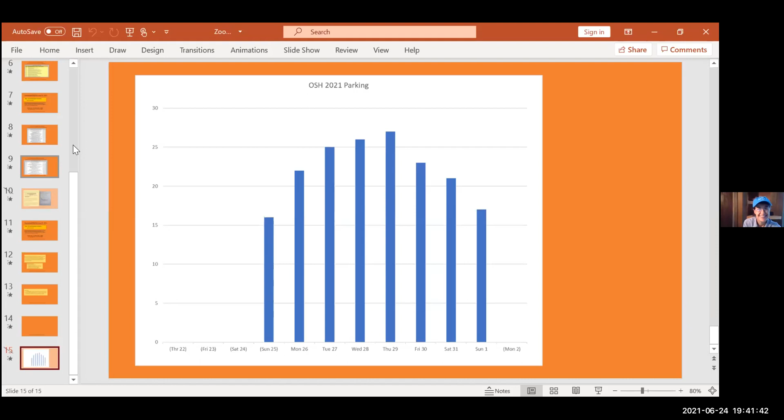Pete's put up a list of what's upcoming. For those of you who don't know, Katama has literally some of the longest and best grass runways on the planet. You literally park and drive your airplane down. They give us a discount for parking at the beach, and there's food available. So come eat lunch, get ice cream, bring your family, and go to the beach.

Hey CJ, about arriving with everyone else to Oshkosh and parking with everyone else, is it going to be difficult to park with everyone if we don't arrive together on that Friday before? It will be more difficult.

The reason is that Vintage created an official first come, first serve policy. They've committed to a couple of things. First, the reason we want as many people on the ground on the 23rd is Oshkosh rows are 7 airplanes wide, so they literally park next to each other, 7 wide, leaving enough space to drive down the middle of the road. There's something called end capping, where one end of the row is open so airplanes can get in, and the other end is a camping space dedicated only to Comanches for ComancheTown.

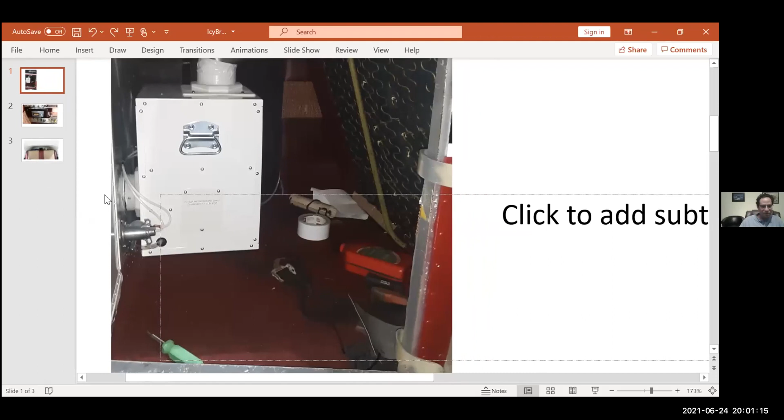In any case, that's the system in there. What you see is the typical Piper external power port that I've installed in the back wall of the baggage compartment. I put a Piper external power plug on the Arctic Air system. Then just above that and to the left, right there is where the hot air exits the system and goes into the tail cone area of the airplane.

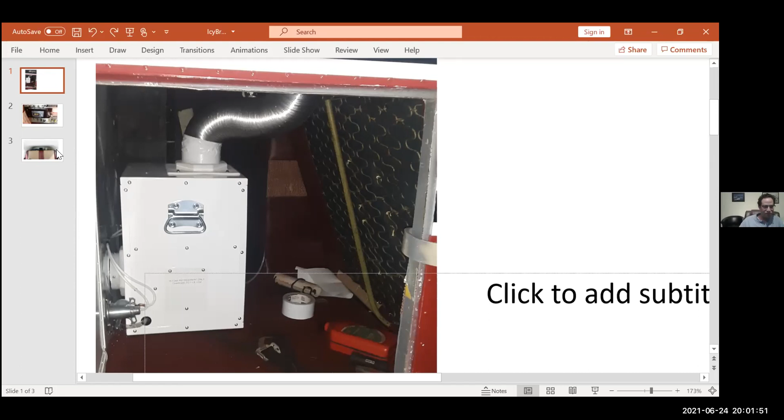Then the last picture there, the middle one, this is the controller for it. I mounted it in the lower left of my instrument panel, just above where the switches are, in a place that long ago had a transponder in it. The controls for the actual air conditioner are that sort of multi-position button on the gray plastic controller there.

This is something I found a little bit difficult to use. The interface is touchy, it's very touchy, that little button there. But once you get used to it, you can do it. To me, a very important feature is just to the right of that, that big metal toggle switch I put in, which is the control for a relay to completely provide power or kill power to the system.

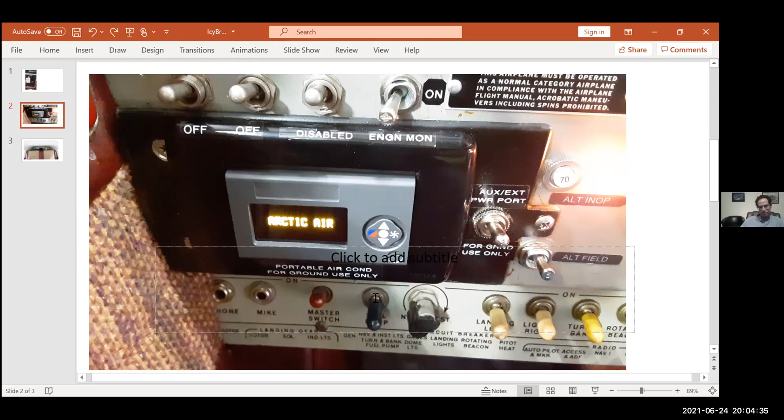I know Greg wants to talk about the system a little bit, and I can add some of the additional issues I've had. CJ, did you say Chris is here or not? Chris Cotton wasn't able to join us tonight. Okay. But his installation photos are here. So do you want me to talk about any other issues I've had, or wait till Greg has spoken?

I would say, well, you mean with respect to the amperage troubleshooting? Right, yeah. I think it's really helpful for people to know that we've got one installed that's working flawlessly, and one where you're troubleshooting some issues, so that if we ran into it, we'd know what to look for and what to do. Yeah, so my understanding is that this gentleman, Chris Cotton, has had his working without issues.

I installed mine over the winter, so I obviously didn't get a chance to run it, although I sure tried, cranking up cabin heat on full and running it to see what happened. But now that it's summertime and I'm really getting to use it, I've had a consistent problem of high amp loads, excessively high, even with low. You can control the speed of the compressor, and even with it turned way down to speed 3, I'm seeing amp loads that far exceed what it should be pulling, and it's been a problem.

So I'm working with Arctic Air to figure out what's going on. There may be a bad board, it may be the compressor, I don't know. In any case, long story short, I think I'll eventually be real happy with the system once the issues are resolved.

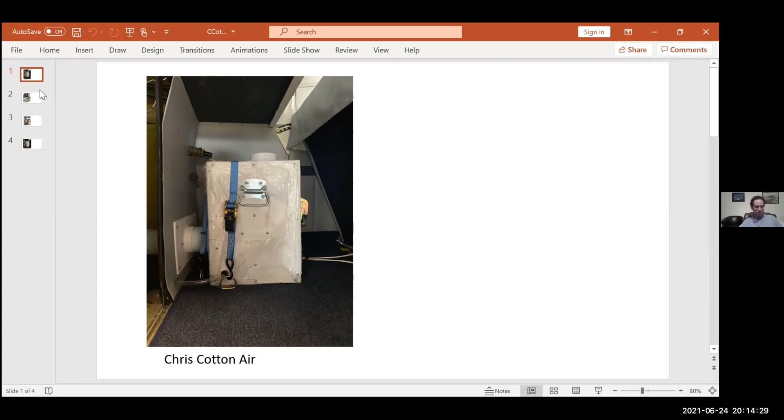And then as a side to that, because we were involved with 12 and 24 volt air conditioning, I was approached by a steel mill who needed to cool the cabs of the overhead cranes inside the steel mill. And I worked with a company, or a couple of companies, that developed a system that does that. So as it happens, I'm also in the business of DC powered air conditioners, but mine are applied to overhead cranes inside steel mills.

Well, it's interesting how you get into any business, in my estimation. This all started whenever I was having shoulder surgery years ago. A company called EB Ice was pumping cold water over my shoulder, and I thought, this could work in an airplane.

I fly Cirrus, and I didn't want to pay the $25,000 for the installation and an air conditioning unit for the plane. I only needed it on the ground, really. So I took ice, put it in a cooler, had an oil cooler at the time, and we pumped cold water through it.

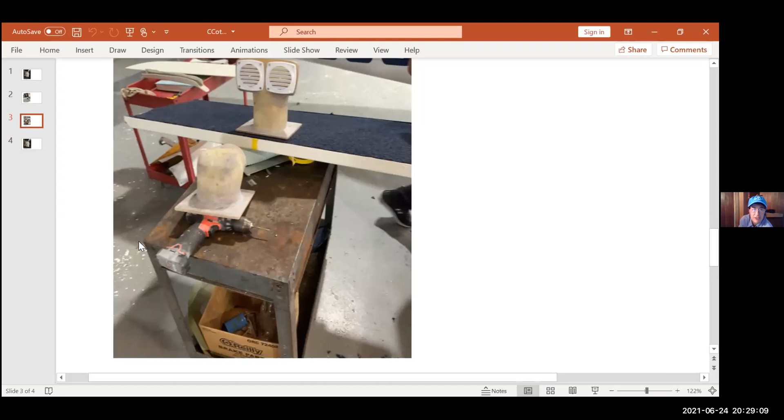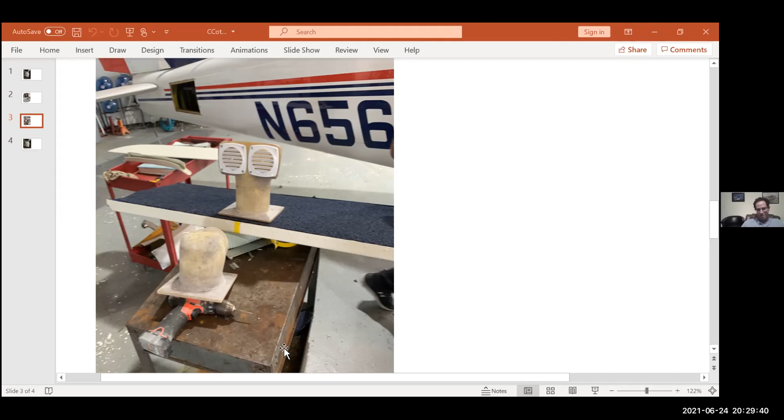Second question is for Mark Sullivan, who has a twin Comanche. Do you need 2 70 amp alternators in the twin? Because the original alternator conversion for the Twin Comanche was 2 40 amp Interav alternators. My answer would be, if you're asking me, I would say no - it sounds to me like you've got an 80 amp supply, with the exception of during an engine failure. But I would leave that up to whoever's doing the job to say. I'm not familiar enough with the electrical system on the twin Comanche to say.

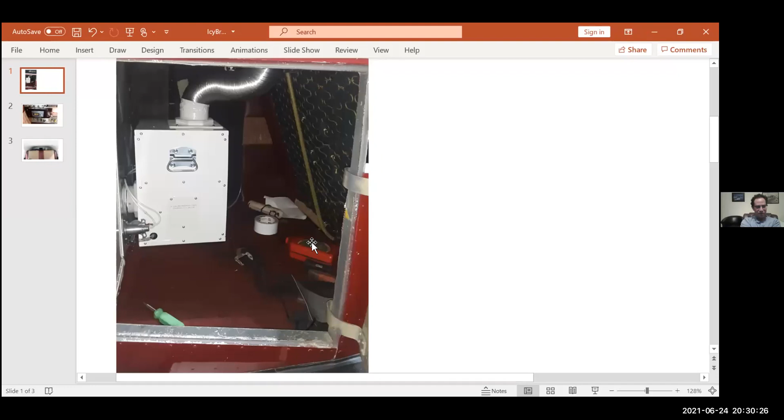I was going to say, if I'm not sure who's running the slides, can you go back to the slide that shows my baggage compartment? I wanted to point out a few things. Okay, there - if you can just zoom in on the box, the white box. Great, perfect. So they talked about removing and installing it - if you want to take it out, it is a pretty easy setup.

So there are basically, let's see, pictures of the component - you just swipe it to the left. There's basically 1, 2, 3, 4 approximately connections to make when you want to take it in or out.

One is, of course, the plug, the big Piper external power plug you unplug. And then just below that, a couple inches below, is the condensation line. The way that I did it, it's routed through the back wall of the baggage compartment, and I have it running out to my reversed air scoop in the belly, so any condensation would actually drip down into the outflow air from the tail cone area. And I put a quick disconnect - you can barely see it in this picture, but at the very lower left, there's a quick disconnect for the condensation line.

And then, of course, where you see the outflow of the hot air right there, in my case, I simply pull that out, and then I've got a blanking plate that goes over that space. And then the last thing is the plug down in the lower right - that gray cord is what connects the unit to the digital controller, which is up in the instrument panel.

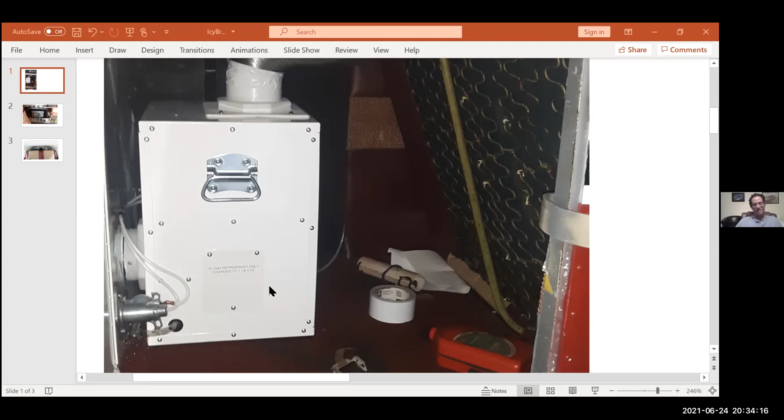Yeah, that duct just doesn't work in this. It doesn't have the bend radius for what you have here - it can't make the turn that we need to make. And the only way to make your duct work would be to cut a hole in my hat shelf, and I didn't want to do that.

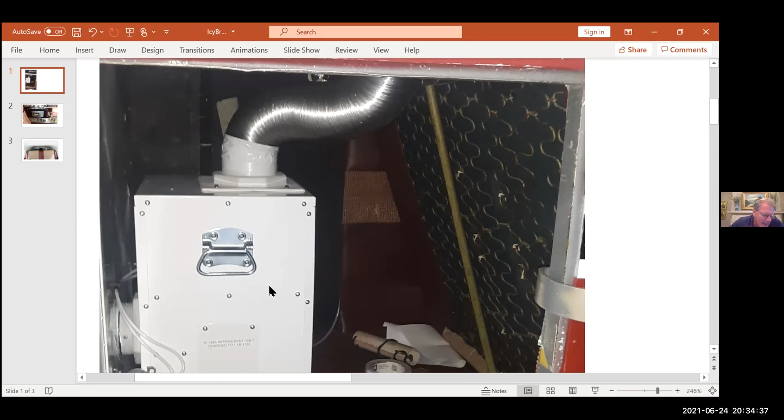Right. So, I noticed one of the other pictures on the other plane - somebody, did they make that out of fiberglass? It looked like they put two diffusers on it and it was fiberglass.

Oh, let me just say one thing before you switch over to that, because I want to finish on the removal and install. One thing I thought of - in my case, I wanted to have something holding this unit in there, in case I got into really heavy turbulence, I didn't want it to be able to fly around. You can't see it in the pictures, but I actually have two quick-connect 3/32 inch steel cables that go from two of the upper corners of the unit down to one of the baggage tie-down mounts. I have carabiners on them, so they're quick connect, and with those in there, there's no way it could fly up or fly around.

I think even if I went inverted - that's right. And the other idea was the handles that we put in there. That was kind of the idea, was on those handles, you can tie it down through the handles also. We always tell people to tie it down as they would luggage in there. Now, personally, I don't usually tie it down. I think it's a good idea to, but the tying down luggage and all, I don't do as much as I probably should.

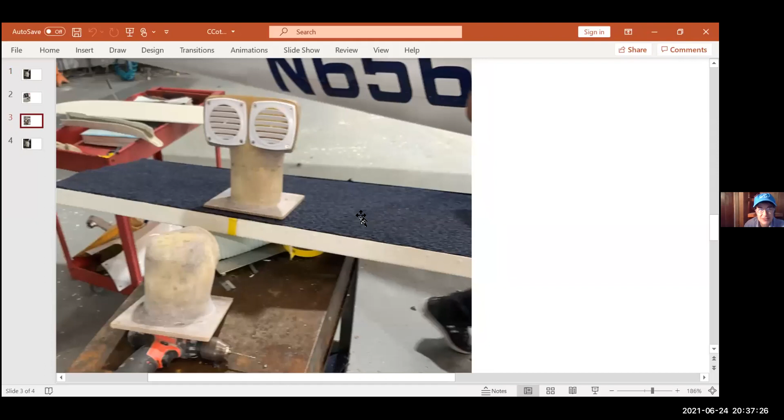And just real briefly, John, would now be a good time to jump over to Chris Cotton's photos for a second? Great, okay cool. Pete, if you can swing over to Chris Cotton's install photos for a sec, I just want to point out the louvers - back up one second, because that photo shows the louvers sitting on the bench getting ready. And then if you want to just go ahead to the photo that showed the entire airplane, or maybe it was a video, I forget which.

You can actually see... you know what, I don't know what they are. It's a good question, but Pete's circling the tail of 6561 Pop. Those vents are only on that one side of the airplane, but it was something he innovated as an extra way to get the air out. What he's done is replaced an inspection port.

We've always recommended the inspection plate because it was not a structural component of the airplane. That's where a lot of times I like the reverse scoop. I like the looks of his with the paint and everything else he's done. Sometimes I worry about when the vents are going down like that, if there's going to be a wind screen. Having the air, when you think if you're going 180, 200 miles an hour, the air coming by there, if it's able to create a negative pressure behind it and suck the air out, it helps a lot.

What I can tell you is that Cotton said he's in Houston, and he's got the same 70-amp plane power alternator that John Lon installed to enable the installation of Arctic Air in his, and he has the same unit. I sent him the same link that John texted me, and he's thrilled. So whatever it is about that install.

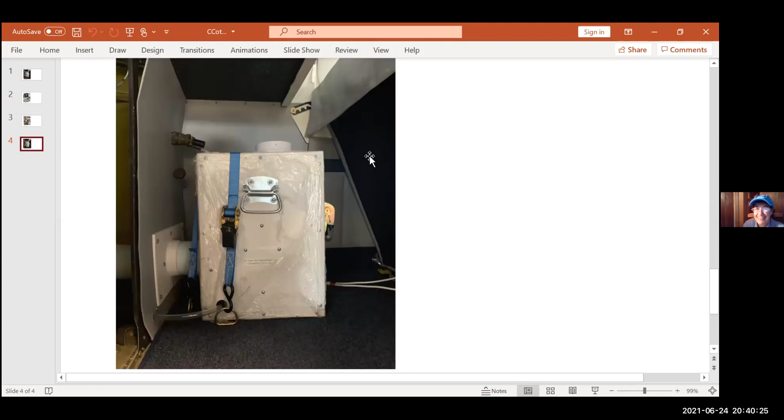That's just a view into his baggage area. In his case, when he was getting all this set up and working on it, he actually removed his baggage door. John, did you do the same thing when you were installing, or did you work with the door still in?

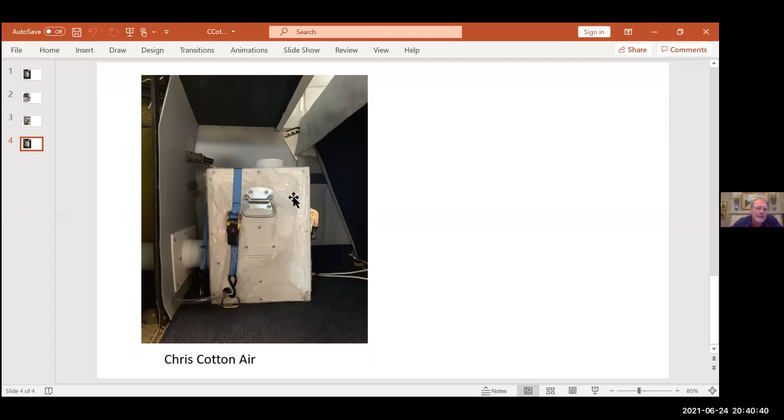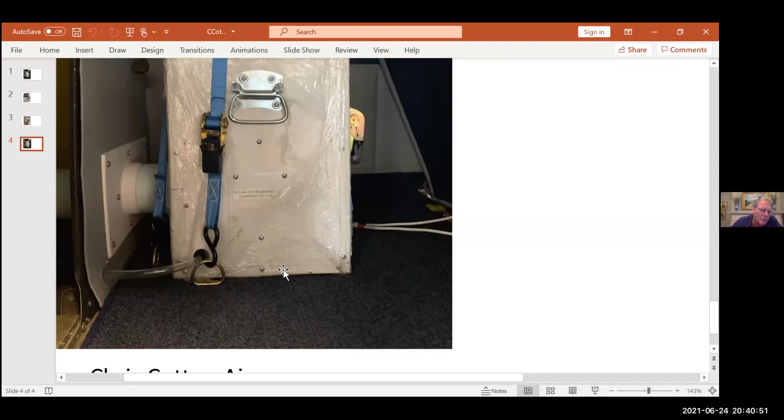Yep. So on that picture right there, it has the plastic piece that we send with the unit, and it doesn't look like he has a quick disconnect on his drain line in that unit. But the white plastic on the back bulkhead is the one we send with the unit, and that plastic duct connecting them is the one we send with the unit. He was able to clip it, but I don't see a quick disconnect on the drain line on that. Mine looks just like his, except that I omitted that plastic square.

Did you use our duct? Yes. Okay. Yes, and his duct, it looks like he ran it through ours, and to the left side of the bulkhead there's a white piece - it looks like he flared it out by twisting it on there, which is great. And then I see the wiring running on the floor up to the front of the airplane, it looks like, for the 12 volts - the positive and negative, it looks like.

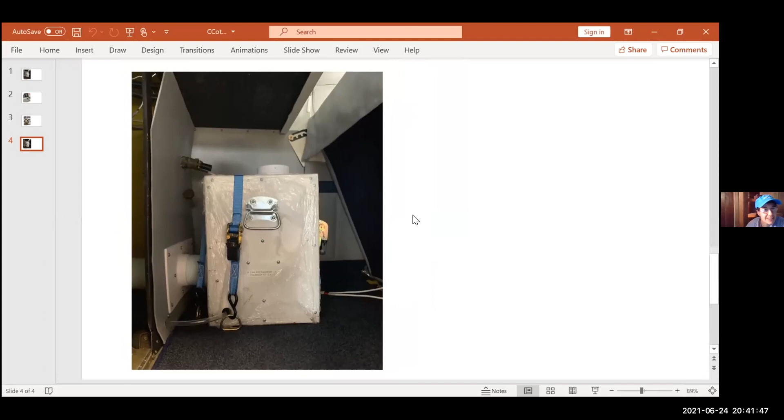Yep. And then if we pop up to number 1 real quick, I think that was just a photograph - the same thing we were looking at, just a little bit closer. Thank you very much. Anybody have any questions before?

I wanted to ask Greg just to talk a little bit about how it works, since you and an engineer designed it.

The unit in the center, right there where the 3 screws are across, is a panel. There's a panel going across the unit that blocks it off - the compressors on the bottom, evaporator in the top, and the drain pan, of course, on the evaporator. The fans - there's a fan in the back and a fan on the top - and then the vents on the back come through the coils as it comes through to go up to the evaporator, using 134A as the refrigerant.

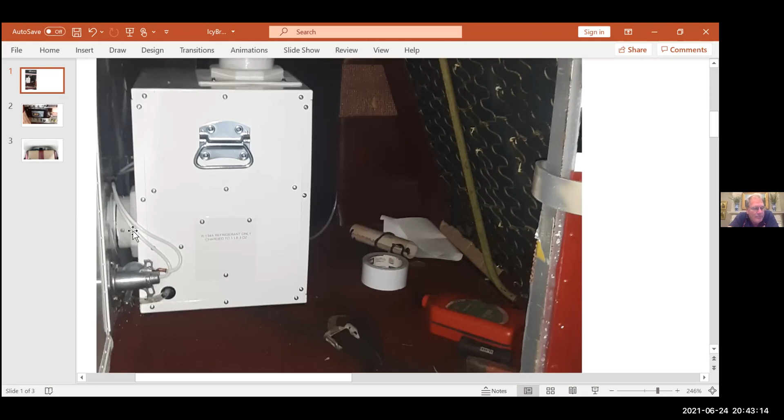These have a 12-volt compressor, a variable speed compressor on there. And whenever we originally designed the unit, I had all the airflow completely wrong, really. But it did work for a little while.

And that's whenever I got the mechanical engineer that just works on air conditioners, and he does it for more air. Andy did a great job, and pretty much he taught us how to build them whenever we originally started there. And once we got through the first 10 or 12, I guess originally,

our first sale really was out to Arizona, and we sent the units out there. We had tested them here, and we're in Georgia, and it gets hot, I thought. They called me, it was 20 units, they bought the units, and they called me back and said they were cutting off on high temp.

And I was like, they can't be. There's no way. And I told them I would come out there. The next week we flew out to Arizona, and that's the hottest place on earth, I think. I told them, it's 120 degrees out here on the tarmac. They probably don't work. I said, send them back to us, and we'll make sure we get them right.

At that point, we changed some of the coils in there, and went to a 4-row coil, really, and the engineer worked on it, and we sent them all back. And we're still getting those units. We still work with them today. That's been 15 years ago, I guess, 12 years ago.

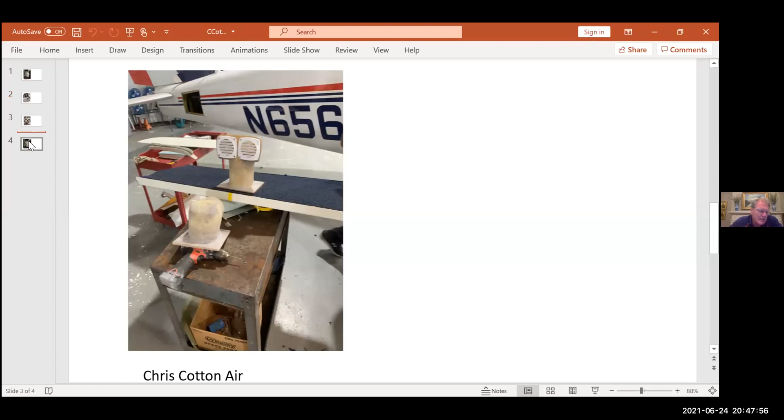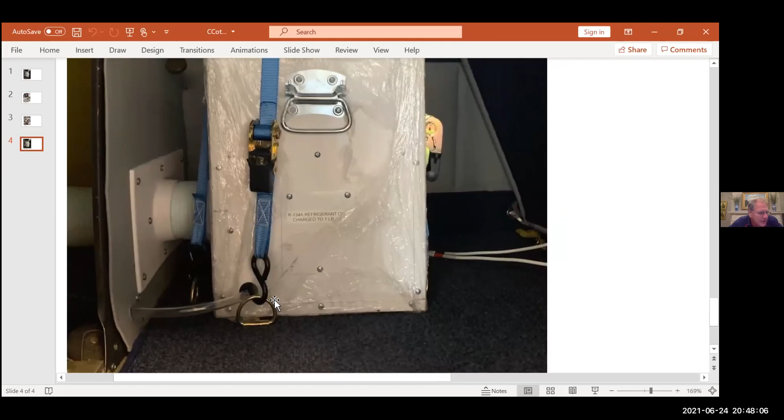And really, to me, that's the way to go. And I like your plug there. We probably usually recommend a Cannon plug, which was in the last slide, I guess. The Cannon plug has kind of got a ring on it that screws down, but especially if you don't have an external source on a plane, you could easily jump it off from having another plug that you can plug in there to, especially being 12 volts, that you can hook jumper cables to. On the Cirrus, we have an external plug, and I find it very useful because I've had to use it several times just to be able to jump the plane off. Yeah, that's the Cannon plug there.

And the reason they don't come with a plug is the Cannon plug is pretty expensive. Matter of fact, I think it's too expensive. It's a nice plug, military grade plug, and you can get all kinds of plugs that will work on this for like $25 or whatever. So I thought it was very good to leave that up to if somebody wanted to save some money on something, they could.

Yeah, couple of quick questions. How does air get into the unit? On the front side, for the discharge, it comes in on the front. There's a grate on the front, and that's the exhaust air.

But it's got to come into the plane somewhere, so normally it's coming in from the ram air into the plane. One of the problems we've had is people would cut their vents off. Well, if you do that, it's almost like putting a dirty filter in an air conditioner. It's blocking or restricting that airflow, which is causing the amps to go up. So the two places for restriction we're concerned with are the airflow over the coil and out the rear of the airplane. If you have a windscreen, or some people haven't put vents at all on the tail section, they would see it run for 10 minutes and then build up the temperature.

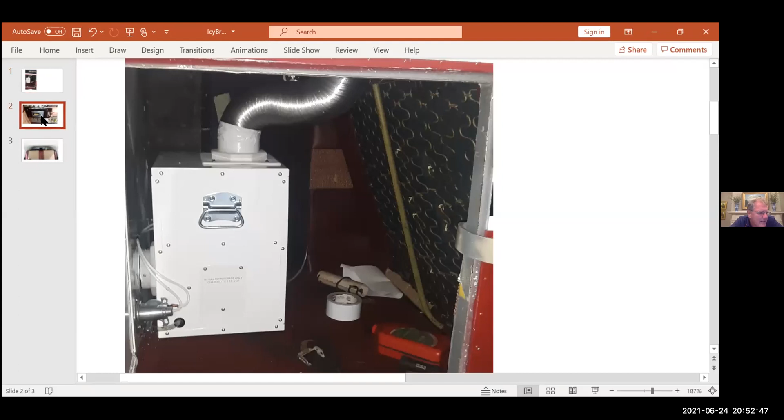Well, I'm thinking about the 24 volt unit really. We can control how fast we run the speed control on the unit with the toggle switch there. You can run it as low as 15 amps, and you can kind of set that on the speed control with the toggle.

So what should it be on the 12 volt or a 14 volt airplane? What should the running amps be? It depends on where you set the speed control. If you set it wide open, it's going to be somewhere around 36 to 38 amps.

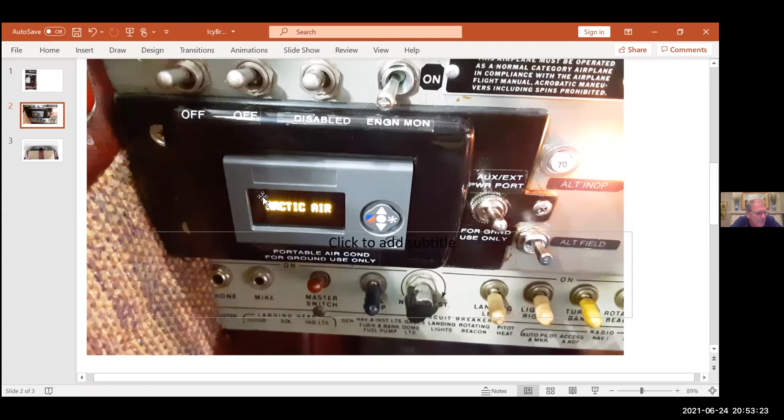Our literature could be wrong on that. Yeah, the literature, I'm actually looking at it right now. And for this unit, it said—this is always the fun thing about running a small company, right?

For this particular unit, it's stating the plane will give us—let's see—Arctic Air can control the amps you draw at a low of 19 amps and a high of 27 amps. Startup peaks at 40 amps for a split second and levels off at 25 amps. If the plane gives us 27 amps of power at 12 volts, the unit will put out 7,000 BTUs of air conditioning. And if the plane gives us 19 amps of power, the unit will put out 5,000 BTUs of AC.

Okay, I may have been incorrect when I said 38, then it may be 27 on that. Gotcha. But I think that influenced our two A&Ps and their decision to go with the 70 amp plane power alternator, because I think, John, were you the one that said the rule of thumb is no more than 80% of amp rated current? I think there's actually an article about that, if I'm not mistaken.

And yeah, it's a big deal, how much power it's drawing. I think Chris said he was seeing like 25, 27 amps. That is correct, and Chris wrote back and said he did it like you as an A&P. Given his employer, I think that's a pretty good indication that in the Comanche you can do it as an A&P. He said his amperage was 20—he was drawing this from memory, but he said he's seeing 20 to 25 amps, and loves the unit. It's cooling.

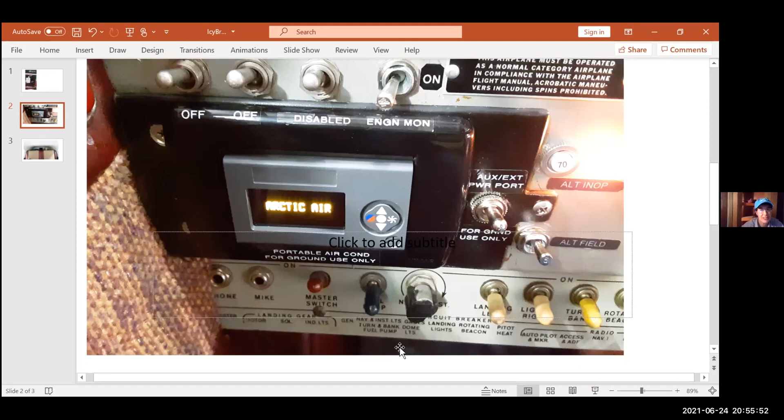Expect a couple of answers. So a couple of things: PJ Vanilla has been patiently waiting, and he's an innovator who's done a lot for the Comanche community. There's still a bunch of questions in the chat, and this started out as a Comanche Zoom really focused on innovation coming out of the community. And then a couple of folks with Arctic Air solutions, like John, who's really happy when it's running but working through some issues, or Chris Cotton, who's got an install he's thrilled with, and he's in Houston.

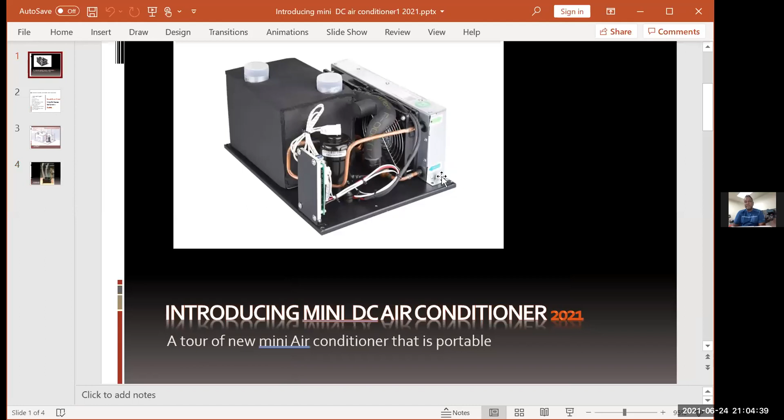PJ, are you able to see your overview slides here on the screen right now? Because I'm looking at them and it's pretty cool. I am looking at it. So like I said, the footprint on this is 350 by 260 by 180 millimeters. If you want to convert that into inches, you're hardly looking at maybe 10 inches at the most, 12 inches by 10 across. And then it sits about another 10 to 11 inches tall, and that's the footprint of it.

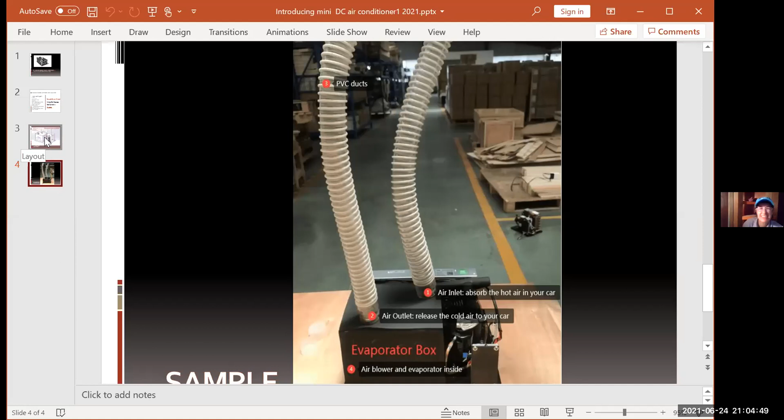I should convert that from metric to inches on the next show so people have a better idea. Sounds good. And you can just say go to slide 1, 2, 3, or 4, PJ, and there you go. So if we can go back to slide 2, it has a little bit of a verbal description of what we're looking at.

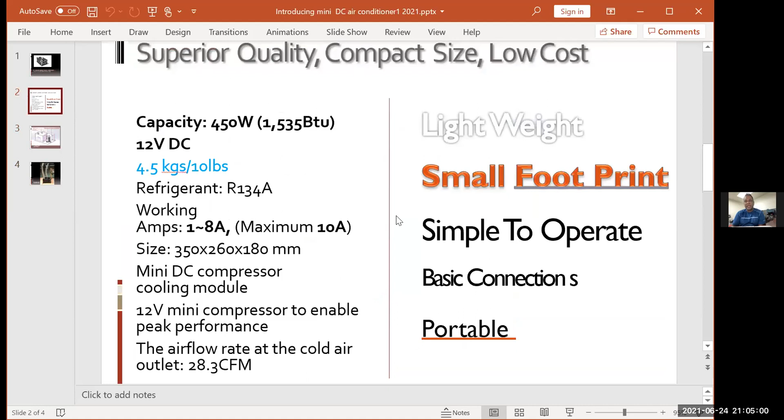As Greg mentioned, the potentiometer on the system controls the speed of the fan, the higher you go, the more amps it's going to draw. So I run mine at full blast and I'm hardly drawing 10 amps on my system. This is with your airplane on; without the airplane on, it seems to draw less than that. Once it's up and running, it actually drops down right around 7.5 amps continuously. So that's pretty low amperage draw off of your existing system. So if somebody out there doesn't have to spend money on upgrading their alternator, this might cater to them quite well.

I have to say, it is so cool to look at three innovators, Greg Turton, PJ Medella, and John Long, sitting right there on my screen. All three of you have other businesses that you do, and all three of you have created AC solutions. John, for the crane cabs, PJ, you for our Comanches, and Greg, for all of our GA, and I guess PJ's will be for all GA. Part of the reason I was excited about putting this together is to note that we have great engineers and pilots and owners who come out with things that change our lives. I'm just super happy to see all of you and to hear a little bit about how these stories came about, because we got a product, but you're doing it almost as a side business, and it's something that benefits all of us.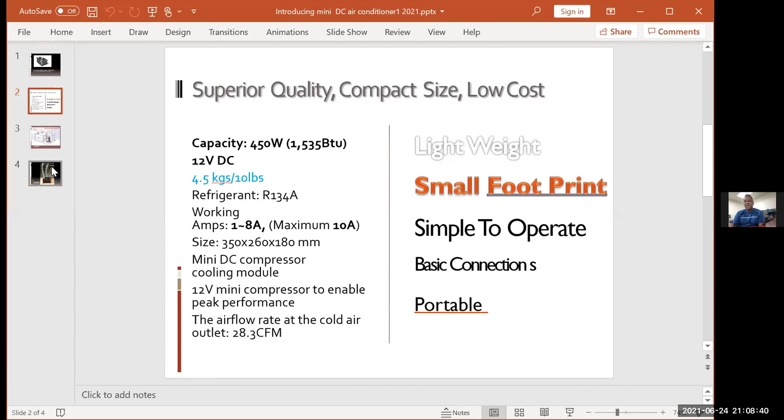And then the third, the last slide is basically showing you how you can set it up in a portable situation. If somebody wants to, it does have a drain plug on the bottom. If you connect that and dump it underneath the airplane, you're good to go.

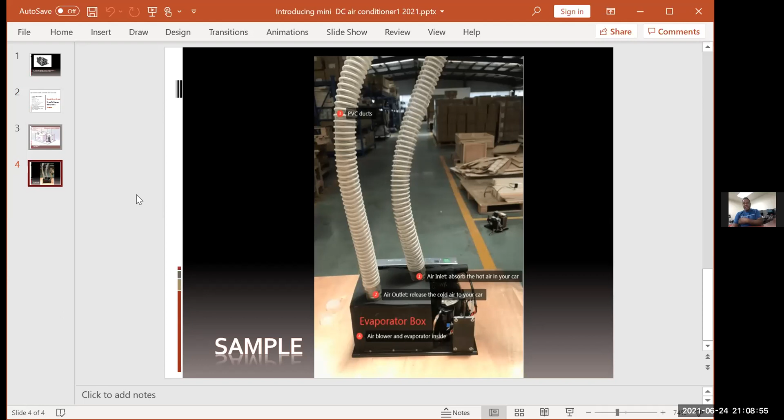And I'm trying my next phase of this. If somebody does want to do it portable, we're trying to come up with, is it possible to just plug in and out of a USB, as long as the USB outlet is capable of putting out at least 15 amps of power, then you should be able to just plug this into your USB outlet and you're good to go.

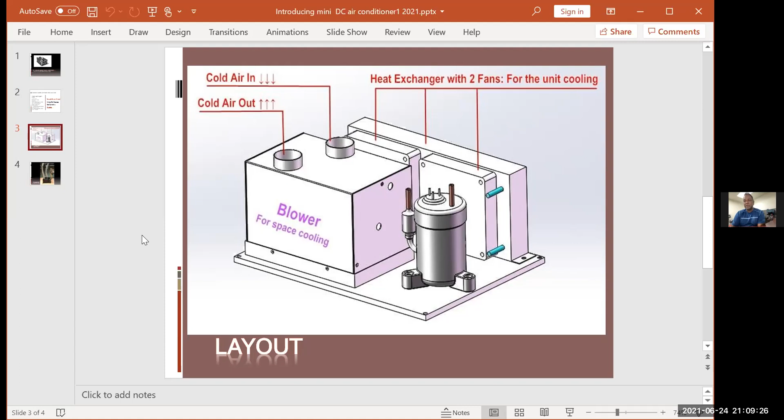But currently I have mine set up through a breaker. I put a 15 amp breaker, it's got its own line by itself, and it's connected to the avionics. As soon as I flick the avionics on, this thing can go live right away. When you flip it off, it turns off.

The unit that I have in my airplane does not have a controller to set the temperature, but the units that I ordered do have it, so you can set the temperatures higher, low, as well as the fan speeds on the controller. And you can mount that controller up front by the panel if you like, so you can make it a little remote controller for it.

Interesting. Yeah, so more to come in terms of how I installed it and how I can make this work.

We were looking forward to doing a second session on air conditioning. As your product moves forward and you get your delivery, everybody, Garmin, S-TEC, had delays in getting things available. The shoulder harness folks, we've got a group buy special going on for shoulder harnesses and webbing. They had delays too, so I wasn't at all surprised when you told me there was a little bit of a delay in getting equipment.

Greg, is that affecting Arctic Air at all? Because one of the questions in the chat window was, are they in stock, ready to ship?

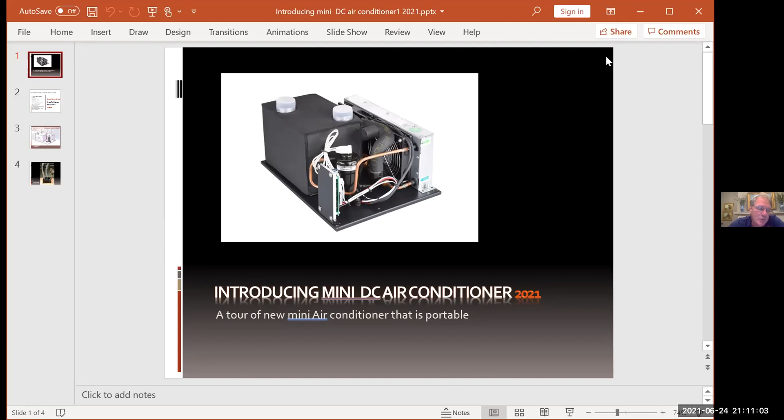Ours are built to order. We have most of the parts in stock. Normally it takes about 2 to 3 weeks for us to get the units out, but we usually try to have some in stock, though it's always hard. Right now we've had some delay issues with some of the controllers, but normally we've been able to get them out within 2 weeks.

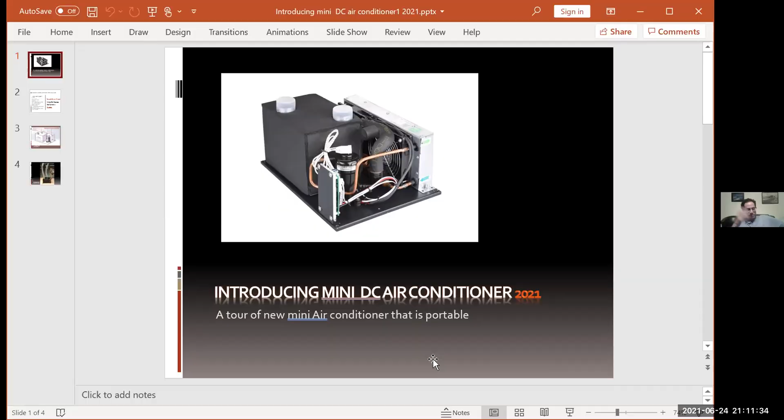Greg, I have a question going back to something you mentioned earlier, about being able to limit the amount of amps. For me, that would be great if I knew there was a limit -- let's say I'd feel much more comfortable if I knew it wasn't going to pull more than 35 amps. How do you do that? And could it be something where people could say, hey, I want mine with a 35 amp limit?

We can set that in the controller, and our engineer will be glad to talk to you later about how to do that. Okay, that'd be cool.

I think what you're suggesting, John, would be a big relief to many of us flying CAR 3 airplanes certified in the 50s. Many of us have generator-to-alternator conversions, with those Plane-Power alternators being very popular.

It ties into a question from Mark Sullivan, who has a beautiful turbo twin. He said, I've got a forward battery. I'm a PA30B. Can I install a second battery near the AC unit, for example a CB25, dedicated to the AC and drawing charging current only from the main bus?

John, that might be a question for our engineers and AC people. Sorry, I missed that -- I don't know if that's a question for John Long or Greg Turton, or if other A&Ps like George might want to comment. Ask that question one more time.